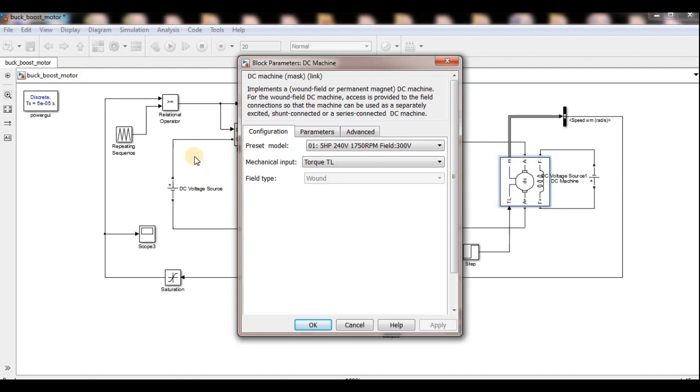Here let's see, the armature voltage is 240, so I can take 140 volts or 150 volts as my input voltage. No need to go up to 240 volts. But in buck converter, we have to go for 240 volt batteries, more batteries connected in series. However, the power will be increased, but a high voltage DC link is very dangerous compared to low voltage DC. So the input voltage here I have taken only 150, so I can get up to 240, as well as from 0 to 150 volts also, because it is the buck-boost converter.

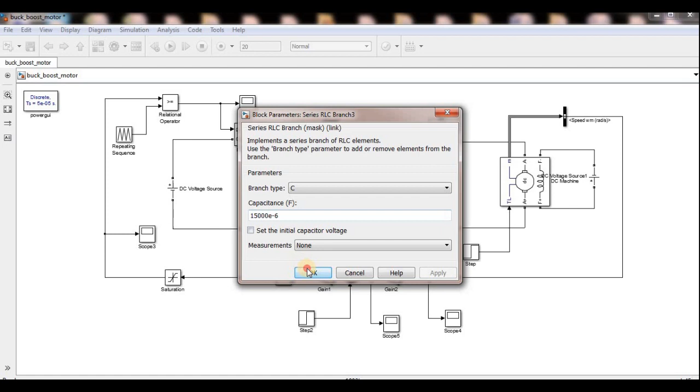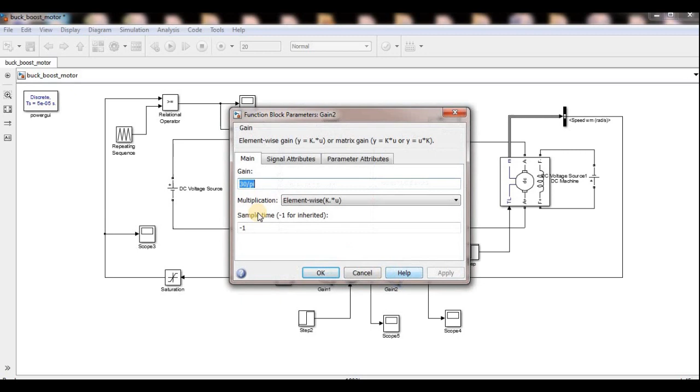So this inductor I consider as 10 millihenries, and capacitor is 15,000 microfarads. And this is the closed loop controller. This is the bus selector, and I selected speed in radians per second. And I converted the speed to RPM using 30 by pi, and this RPM I am comparing to my target speed. So up to 10 seconds I want 500 RPM, and after that 1500 RPM.

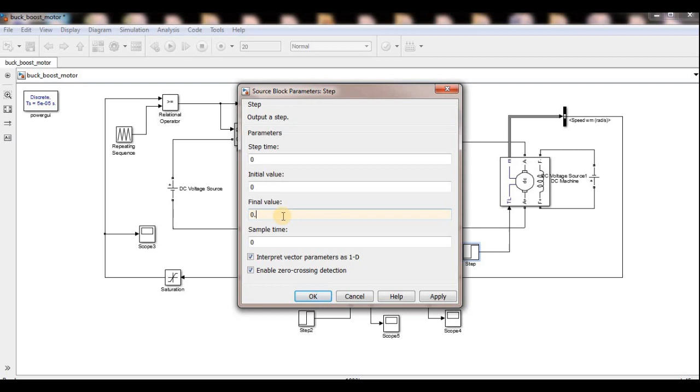At 1500 RPM my voltage will increase up to like 200 volts or 220 volts, so it is acting as a boost converter. For 500 RPM the armature voltage is less than the 150 volt input. And this is my load torque. Initially it is 0, and after that 0.9. Here also we can change, like 2 newton meter or 5 newton meter or 25, whatever you want. I will operate at 0.9 only. It is very less actually, but for getting better response, I applied very less.

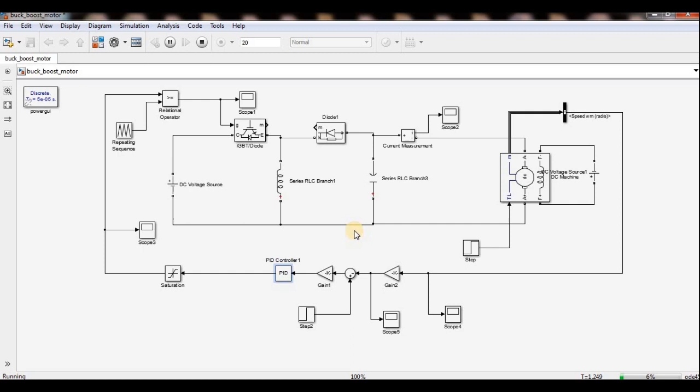And see, this is the buck-boost converter, so the output terminals have to be reversed. This is the negative and this will be the positive. So according to that I made my field reverse also. This I connected to negative, and this I connected to positive. And this is the PI controller, because I made the derivative gain 0. Now once I start running the model, we can get the speed response. See, the speed is coming to 500 rpm, because initially I want only 500 rpm. At 10 seconds I want 1500 rpm, so it is reaching 1500 rpm, but it is taking some time to stabilize.

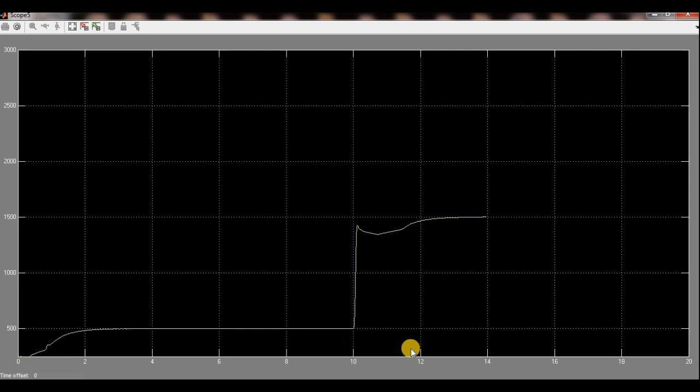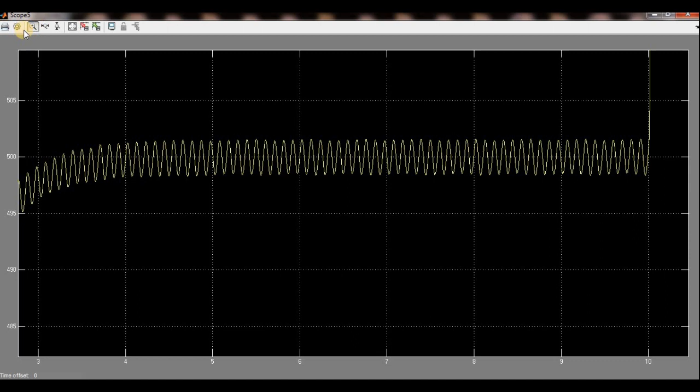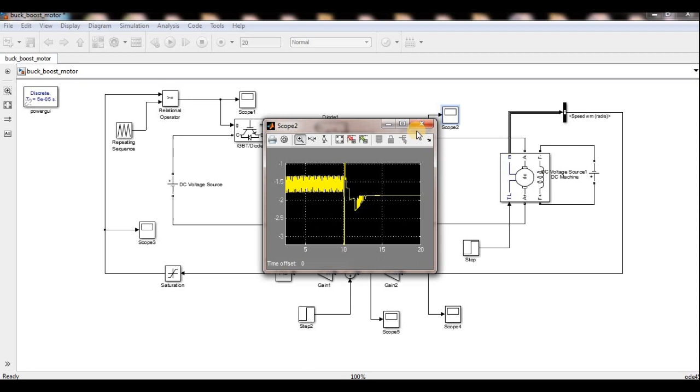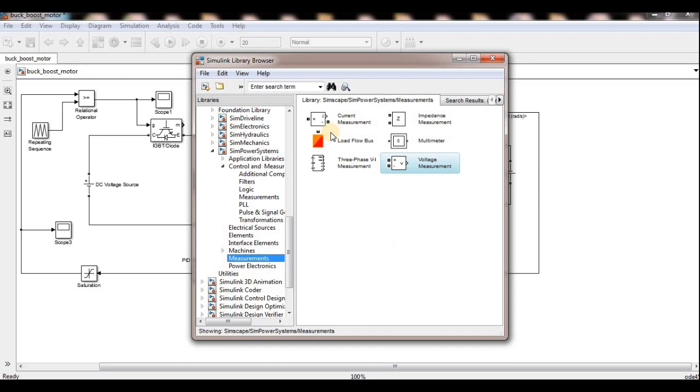So here the duty cycle I am converting to pulses by using this relational operator. These are my pulses, and you can use saturation to limit the duty cycle also. So this is the small project, separately excited DC motor speed control by using buck-boost converter. Now we can see the output voltage, I mean input voltage of armature. I bring the voltmeter; this is the positive terminal and this is the negative terminal. This is pulsating DC, so I require the mean value. Generally very high frequency is required to get accurate DC, and this is my scope.

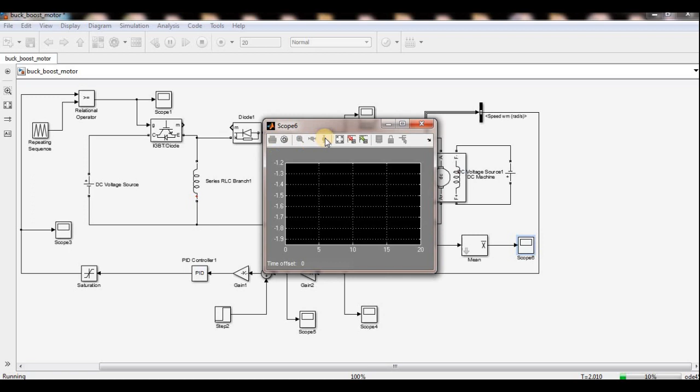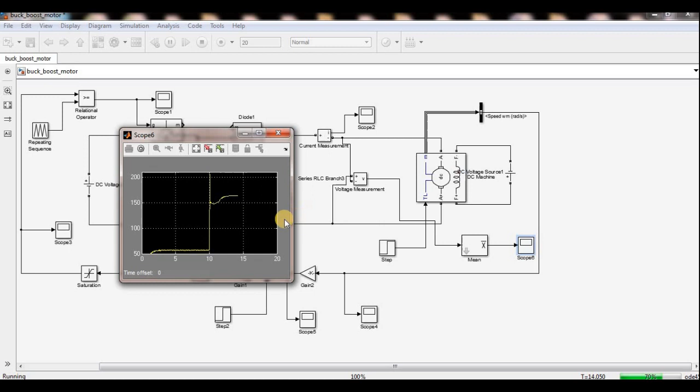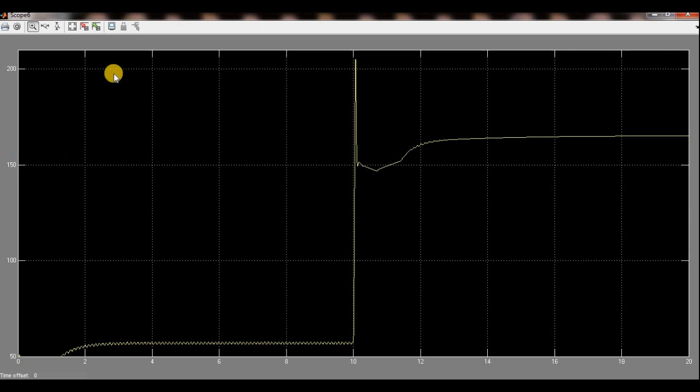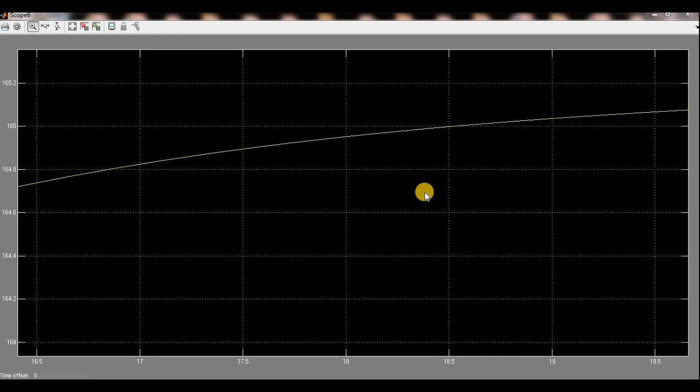Now again I am running the model, and up to 10 seconds my speed is 500. So my armature voltage is very less, nearly 57 volts. My input DC is 150 volts, but I am getting only 57 volts because I require only 500 rpm. After 10 seconds I require 1500 rpm, so this is coming nearly 165 or 170, above 150. So it is acting as a boost converter. Sometimes it acts as a buck converter below the cutoff speed, and sometimes as a boost converter above the cutoff speed. Here the cutoff speed is the speed corresponding to my input voltage.